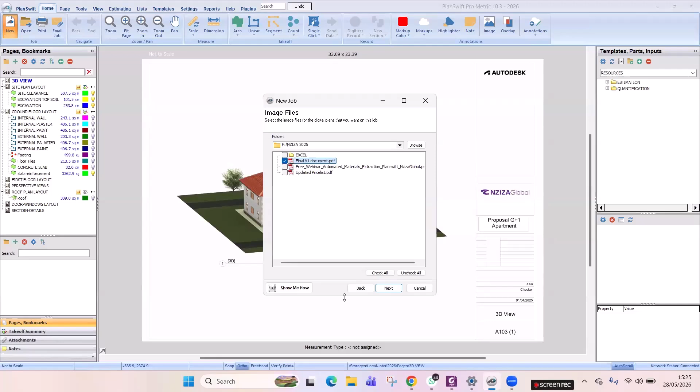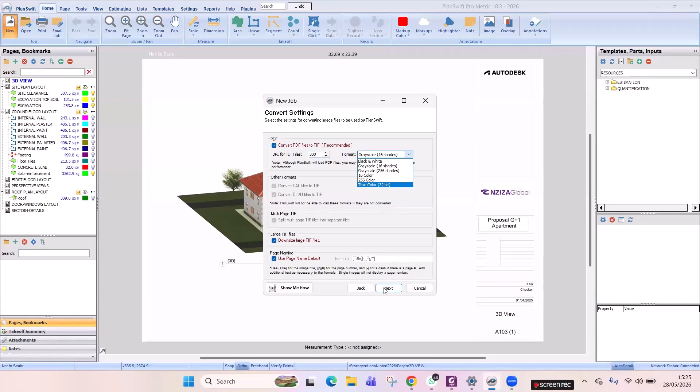Then next, you can adjust how you can read it. Can be 30, or can be 300, and then use 100. So use 300. Here I can use true colors in order to get our drawings clearly. Then finishing, it takes a few seconds, finishing or converting the drawing.

Now our drawing is opened, and it opened for all the pages you have. Here you see the 3D view of our project. Also here we see the roof. Here we see the ground plan. In order to help you, you must name it.

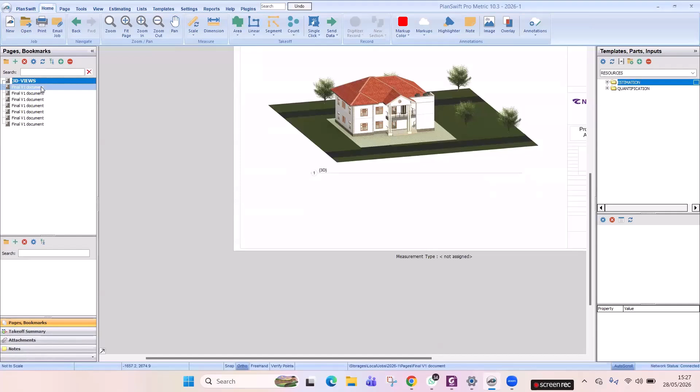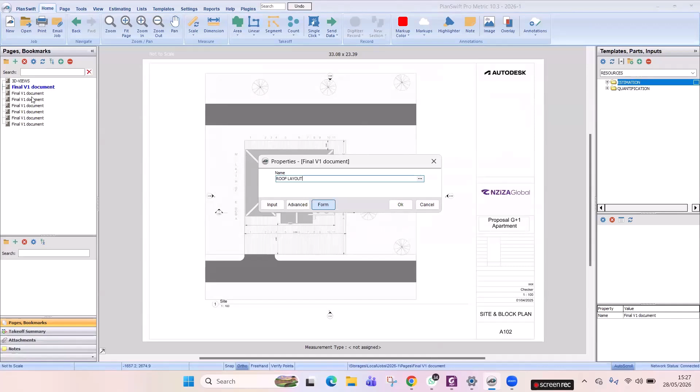This is the first page. You can right-click, go to properties, and set it as 3D view or 3D dimensions, isometric. This is the roof layout, so you can name it roof layout. This is the ground floor, so you can name it as ground floor.

Ground floor. The first floor. First floor.

This is the section perspective view. This is also, I think this is the roof. This is not roof, it's a site plan. This is site plan. Let me change site plan.

Then let me do this, this is the roof. Roof.

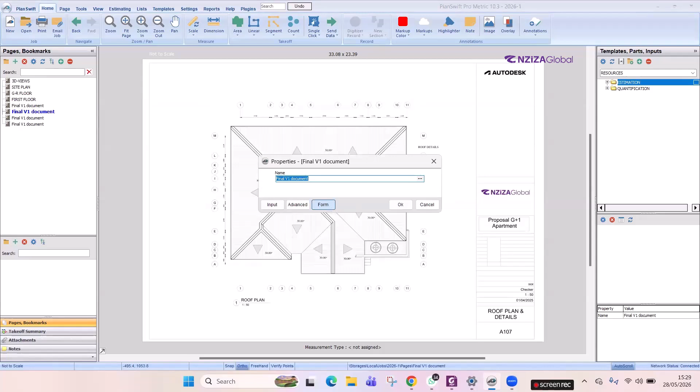This is the section. The section. Section window and doors.

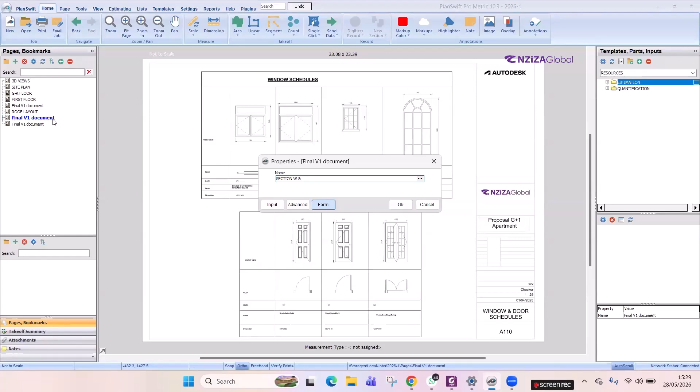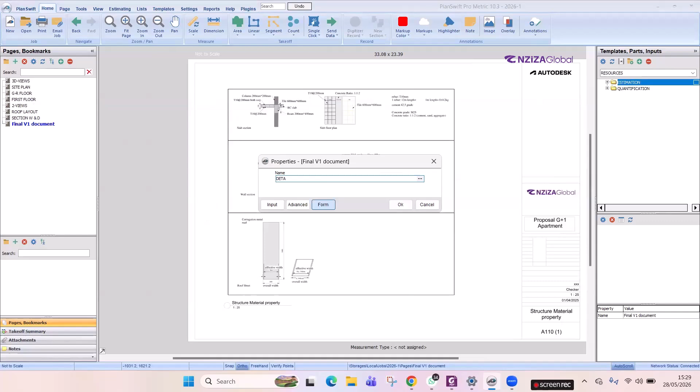The last one, it's this some details. Name it details. So those 4 sections.

This can help you to know what can be taken for the work, or the measurement you can take for first or ground floor in order to perform your project easily. You may name it so that it can help you in your requirements.

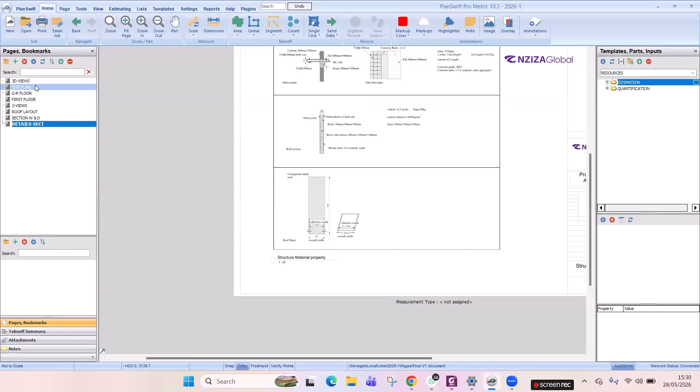So let me first go on the site plan. Site plan. Do you see, there is a...

dimension of 2 meters for the fence. Here there is 18.65 meters, and you must know if this dimension is in meters or millimeters, but most of the drawings are in millimeters.

So if you start without scaling, you can't perform your work. For example, let me show you. It means you can take off the area for the site, for example.

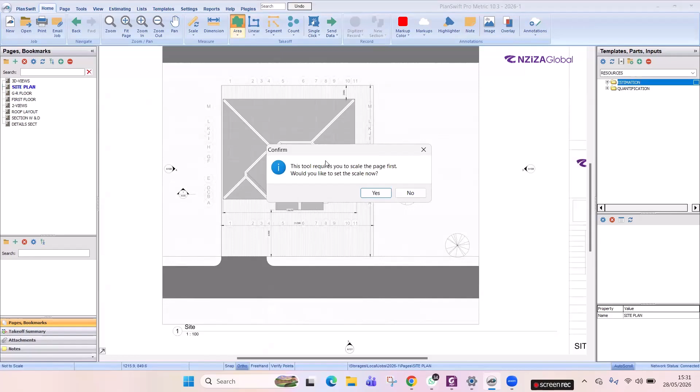You see, this tool requires you to scale the page first. Would you like to set the scale now? Yes. First, you have to scale the whole page you are doing the work on.

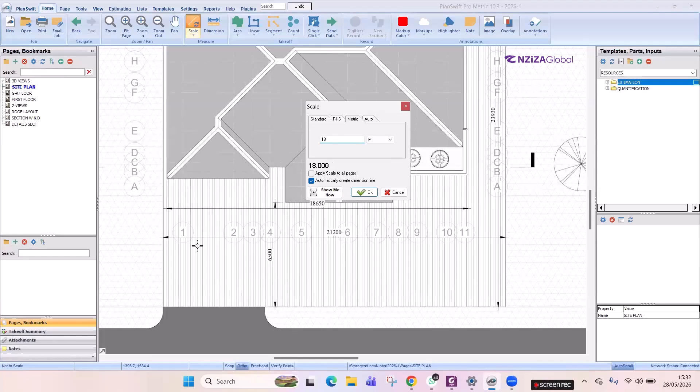This is, for example, let's take 18.65. Go to scale, metric. You have to use metric, or in order to use meters, say 18.65. Then you have to press the cursor from the starting point up to the end.

Do you see? This is the starting point, and the second point. So it's the first step, for measuring your work, first you have to scale. If you forget it, you can't go further.

So let's now take off for site clearance. You can go here, you can use this tab for area.

You can use it, or you can create the template. If you use area, you can do this. This is the site clearance. Site clearance.

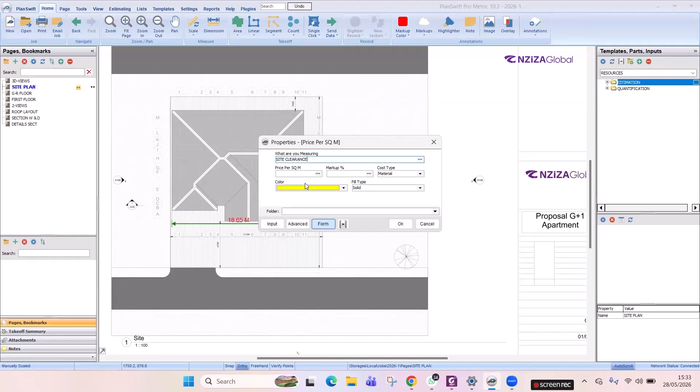Then price per square meter, that's okay. Then you have taken from this box, and use boxing for that here, because it's a box.

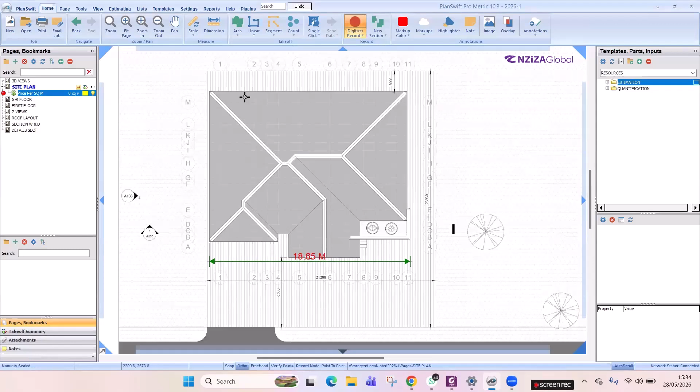You can use boxing for this verification, point to point record mode. You can use box. You start from here, sorry, from here up to this.

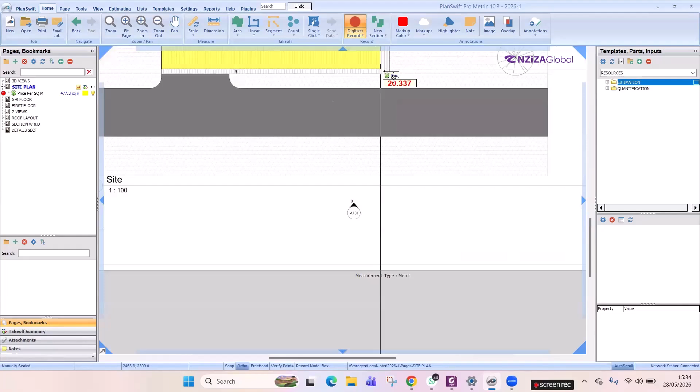This is our area. It means we have 477.3 square meters. This is the manual way.

Everyone can use it, but mostly the PlanSwift user can use it so that you can produce every dimension. Every item you take off can have the description and the quantity for quantification. Here we have the quantity only, but the description cannot have it.

For example, let me show it. If you go here at estimating group, you see the site clearance.

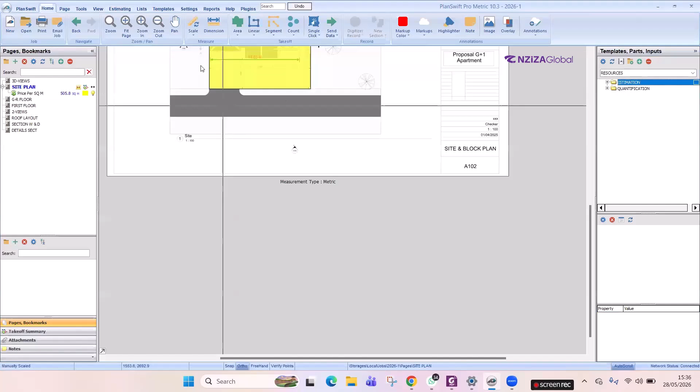But if you create the template, let me show you for template. You can create a template here for area. You can go here, area, then area, to create a new area.

Here we have advanced. In advanced, we have in this item description. If you right click for properties, you have description text set as one type of text in a group of items. Here on the sample list,

we can add description. Description will be the list in the list. Here we can choose the list, but simple list. This is combined list.

You have to select the PlanSwift description. It has the BOQ PlanSwift. Many of them, you can't have the data of that list, but don't worry, for those who will attend, will get it.

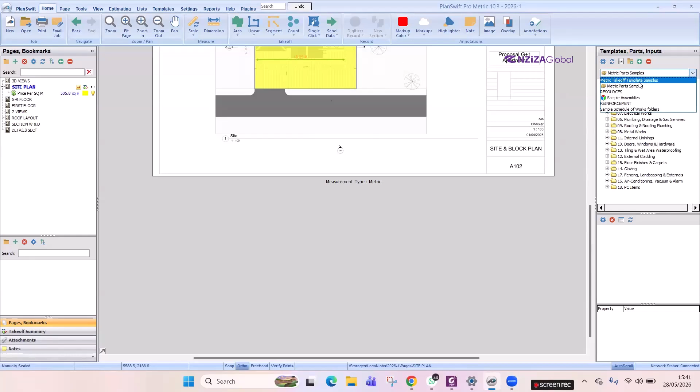See in our template, we see... let me see, we have to create the new area. New area 2, this is our template. This template can be used, so I think most of you know how to choose the template. Also, it's just to click it, site clearance, then here...

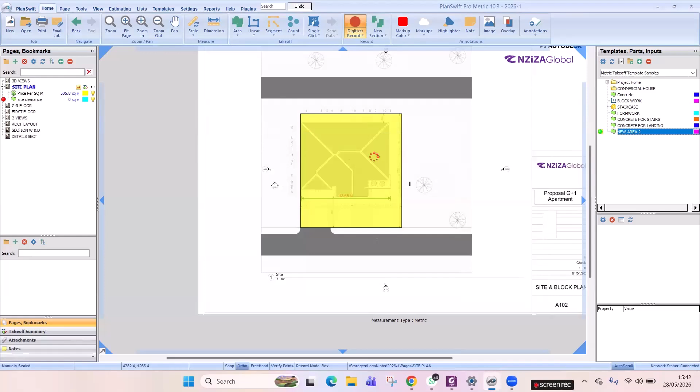We forgot to make the description visible, that's why it doesn't appear on the platform. Let me also do it, you see, this can be taken, and the site clearance will be on description. We have to select the clearance.

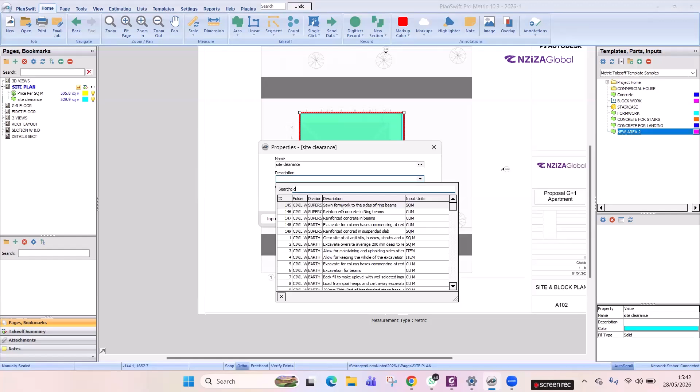Site clearance key. Now I think after finishing you can see the difference for views. Here we have site, but we have the description of the site. This description is clear site of all ant-hills, bushes, shrubs, undergrowth and cutting down trees. This can help you to produce the visual quantity at the end without typing any other description.

And also this template can be used also for other, like can use it for takeoff for any other areas, because you have the template. And...

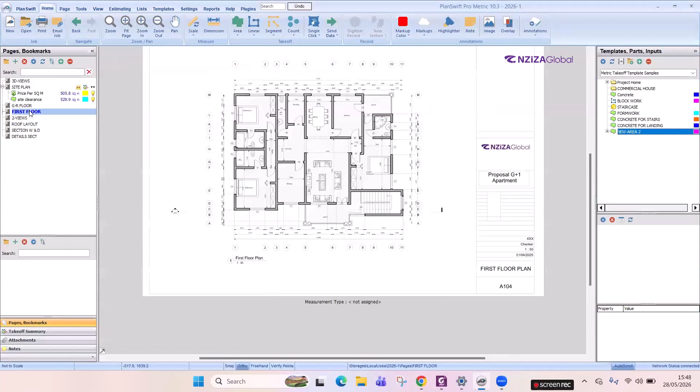If we go back, we can go on our first floor or ground floor for making excavation for 1.0 for topsoil, or 1.5, or 5.5 meter or depth can go on our area volume. This is not what I need, but you can use it.

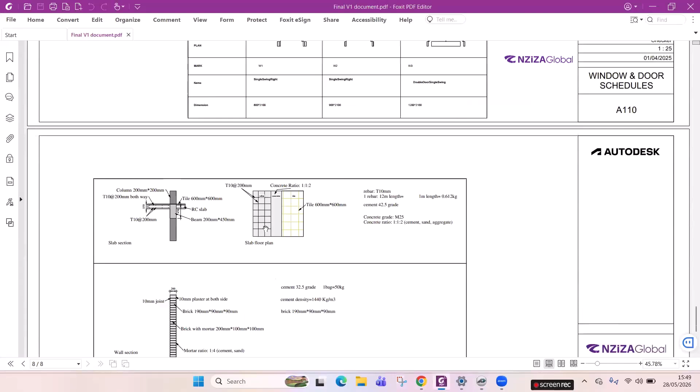Sorry, we forgot, firstly, as I have said, we have to make scale. First, you have to scale and set the metric. Let me share the image. It shows it's 17.45, 17.5, 17.45 meters. It's metric, it's okay.

Then you have to come from here up to the end. Have scaled. In our template, we have created this new area...

But you see it's only a sub for new area 2. You have to make it not a sub so that you can find it on a template, not as a sub of a new item. You see it, this is our volume, area volume, then make it.

There is the description, you have to search excavation. Can be excavation of 0.5 deep. Then depth, it is 0.5 meter. 0.5 meter, then it's okay. Remember, we have changed our record mode as a box, but here we have to make sure our area, and for those corners we have to change it to record mode into point by point.

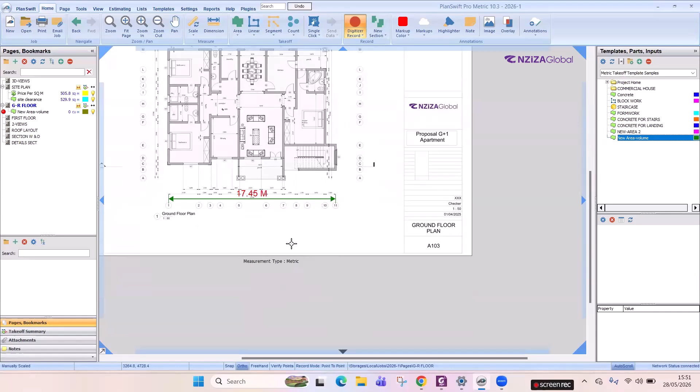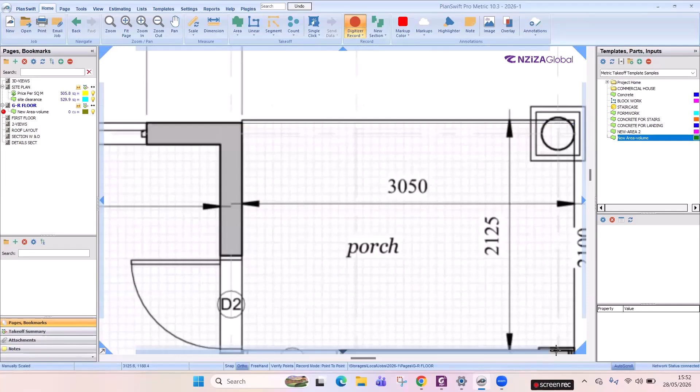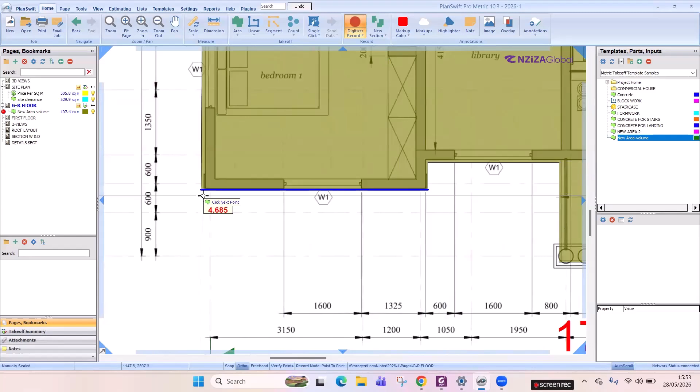If you're measuring first, you can go back for precising the corners. For example, let me do it first. I can't draw it without precision, but you can do it further after, can resize it. As we have said, it's digital, it's not manual, that's why we can't lose the work we have done.

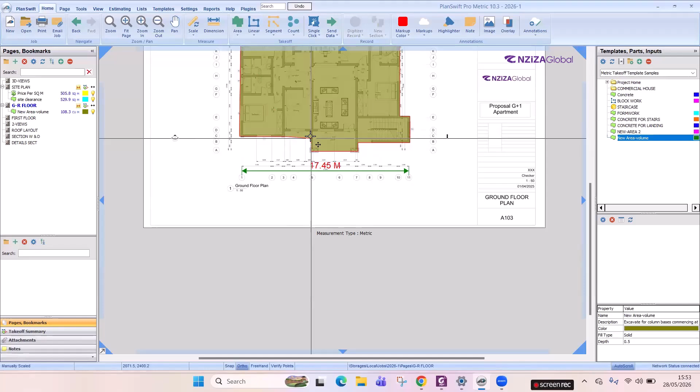You see, this, you can just make it, and you see that it's not precise on it. And on the corner, if you make it magnification, you have to know that it's not indicating at the right corner. You have to make it clearly at the corner.

It's dirt, and you have 108.3 cubic meters. So let me jump on the concrete in order to make the estimation very first. I think you understand how to create the template. The area can get the volume, area can line also can get the volume according to the creation of the template.

So let me use the template I've created for concrete. Concrete can be also on the area volume, but you can also copy and paste any area of any quantity you have measured if they are the same for volume. I quickly right click and so can just make concrete volume.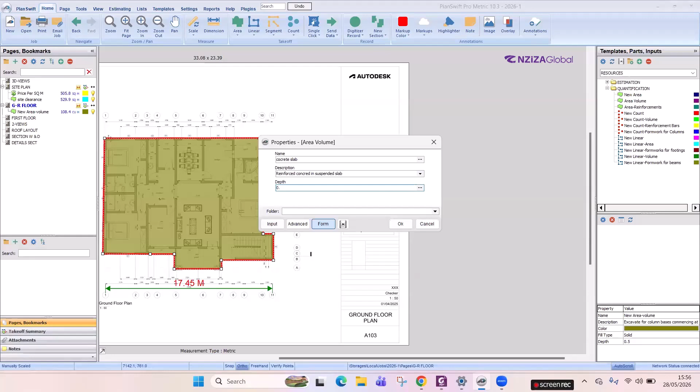Concrete, let me take concrete slab, then can be suspended or ground concrete. Yes, and the depth, let's see, mostly it's 0.1, it's 100 millimeter, then it's okay. So you have to make point by point.

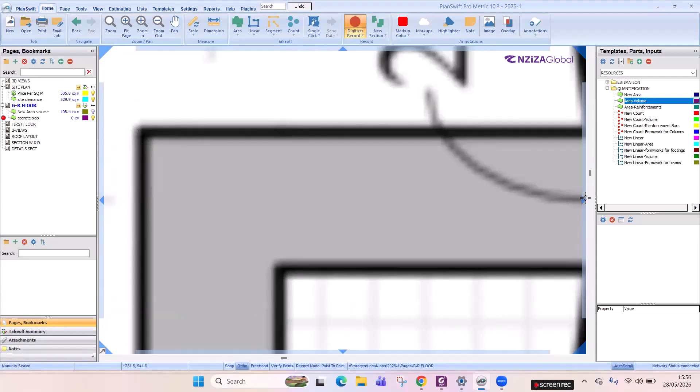Yeah, are you following? Hello guys, yes, we are following. Yes we are, yes. Yeah.

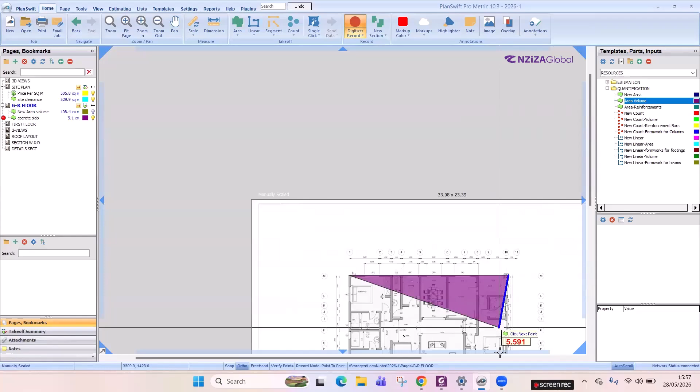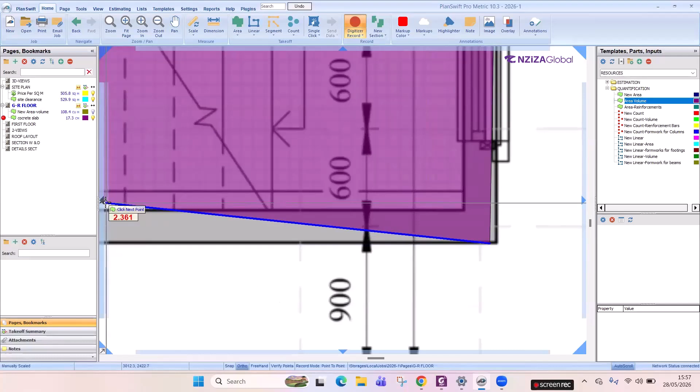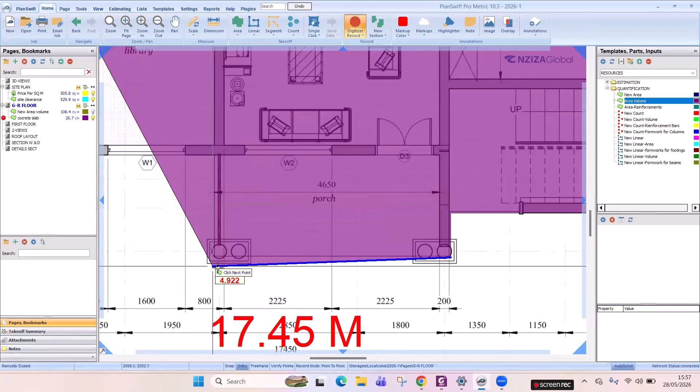This is starting. You can do it first, but remember to precise the corner. If you don't precise the corner, don't worry, you can do it after taking off. Don't click at the wrong corner. Oh okay, it's not manual, it's digital. I have to do it first, but precision, you have to do it. Don't forget it.

You see that our precision is not clear. Now can precise the corner. You see? Have to precise the corner.

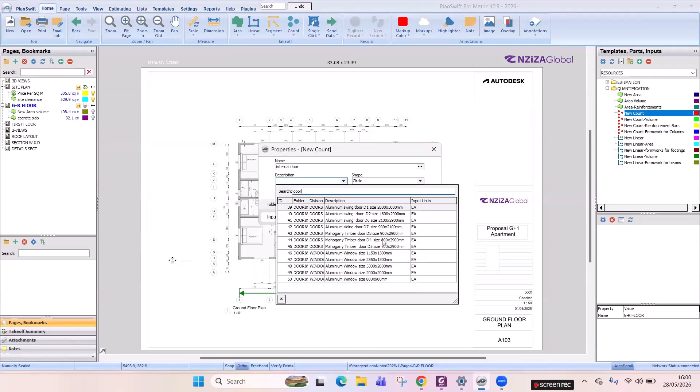Internal doors. Internal doors. Doors. It's internal. Let me select this one. Mahogany timber doors. Then okay, then you have just click.

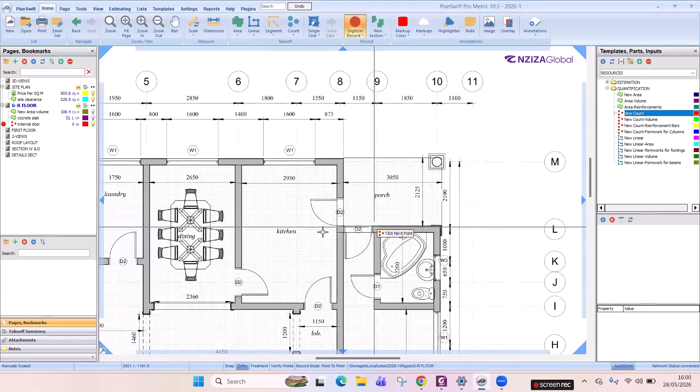Because here we have D1 and D2, pay attention to the drawings. If there's a door, it's a door. D2, I think the dimension can be different. So let me start for door 1. This is 1. This is also 1.

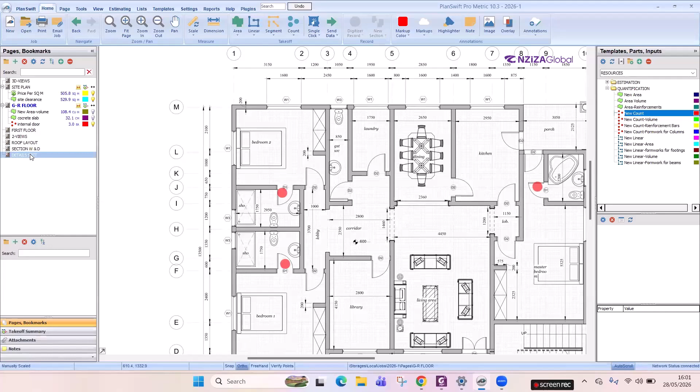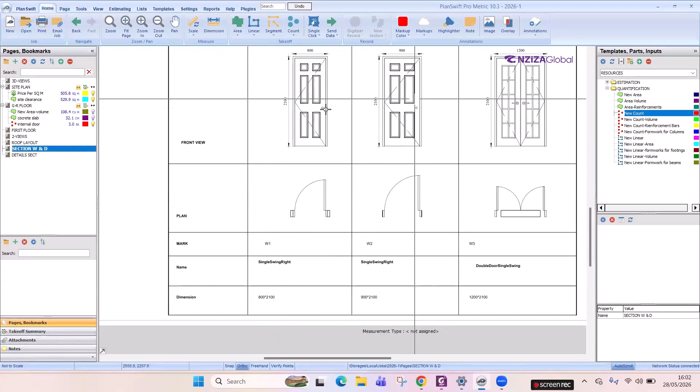Okay, you can measure also door 2, because internal door 1 and 2 are different. Let me see the dimension for doors. Is it different? Doors. Yes, it's different. Like on the window, there's window 2 and window 1 also different on dimension. Door 1 it's 0.8 for 2.1, and the other it's 0.9 up to 2.1. So let me go to estimating.

You can go here on that tab of estimating. You see that you have measured the site clearance, you have measured the excavation, you have measured the reinforced concrete. So for example, for the site clearance, see that there is the quantity, but on the cost per each, there is nothing, it's 0.

Are you getting me? Yes, okay, getting you. We have to apply our job into what the people can do that work. Site clearance can be done by laborers, which are skilled or unskilled, can be done by equipment, the machines, with an operator. Because machines or equipment cannot be separate from the operator, the cost for operator for the machine or equipment can be included with the operator. So let me use the labor.

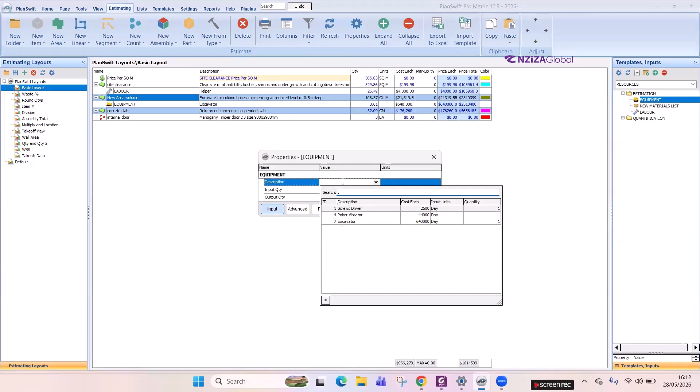And we need also the vibrator, poker vibrator. One also can be vibrated for 6 cubic meter.

Then let me also add rebars. The rebar can be, take one mason can produce, or let me take, if 6 masonry can help 60 helpers to produce 150, means one can produce 25 cubic meter.

Even you can also add the helper. One helper can also produce 25 per day. Then it's okay.

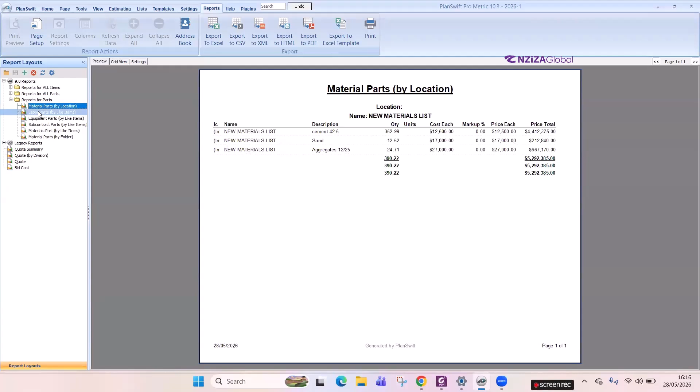And you see that you can get the material list. You see, you can just see the part by location. You can produce these items by labor, then you can export by Excel template, or you can do it by materials. You can sand, you can get the total sand for all.

If you do the job, your project on PlanSwift, all cement bags can get the rest of that. If the sand, you can get the total volume of sand you need for the total project, even for aggregate.

And it's like the materials. This is the combination of, for one item, you can get it all by division or by folder. For example, by division, you have it all for material, for labor, for equipment. It's well detailed.

Those you don't need for estimating group, you can go here and remove it. For example, this markup, you can make it unavailable. Colors cannot, you can color, can even price per each.

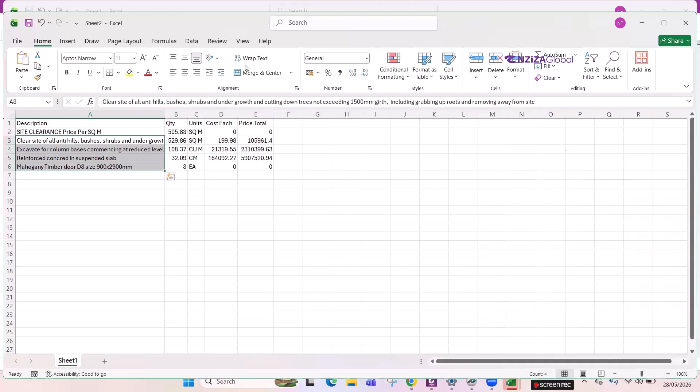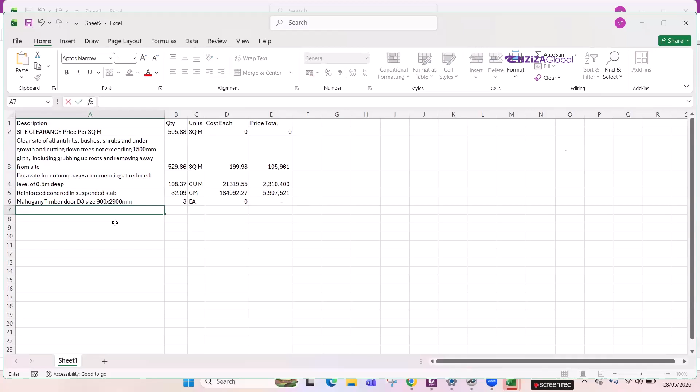Make it visible, and here you can make it at Rwandan francs, and here can get total, can make total. Here I can make a sum, total sum.

It's okay. This can be good for presenting your project you have done, your takeoff for BOQ, and you can report it. You see that it's a good one, which is digital for QS, cost estimators, engineers, and so on, and all of you can use it. So you have to use it.

Also you can export by division. This one can export as Excel, and you save it. How to save it? Well, here you want, for example, I can save Nziza.

Okay. The 2006. 26. Okay.

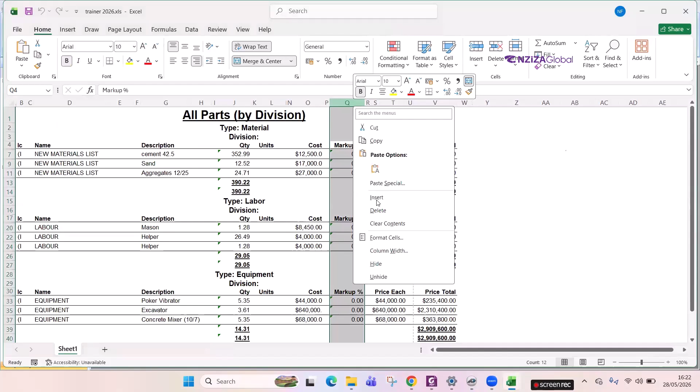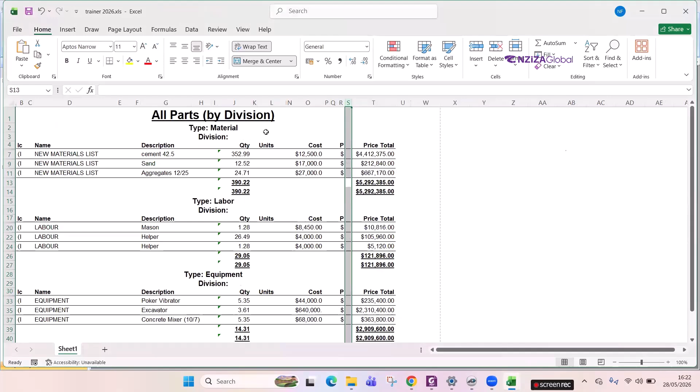You see it's there. Here I can remove any you need. You can remove it for PlanSwift, or we can remove it on the Excel. See, it helps you to know the material, the quantity, and the price by division, the labors and equipment.

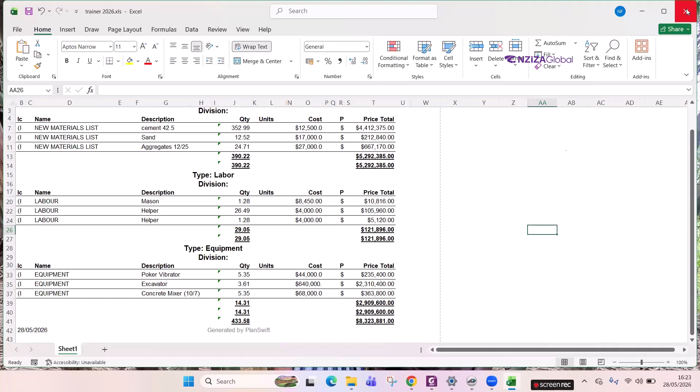Yes, I can show you what I have done before. You may open any job you have done before.

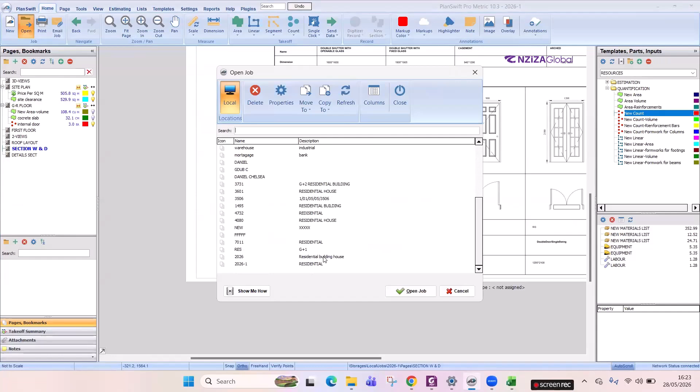This is all I have done in it. Let me open this one.

It's that one, but I have done many things for it. If you see it, how it looks like, and for reporting also you will see.

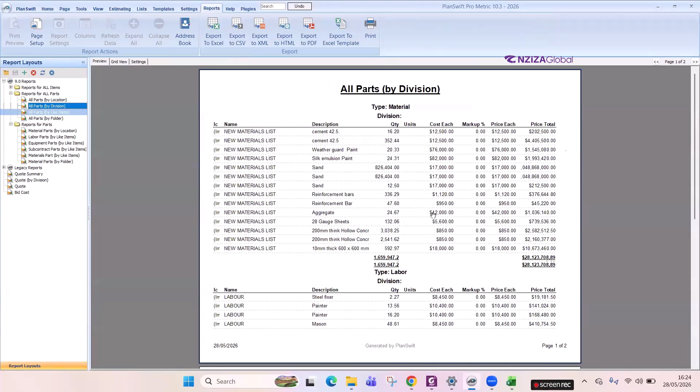As I have told you, do you see those are the materials? Those are the laborers, steel fixers, painter, and mason. And all of those are mason.

It looks like this. Thank you.

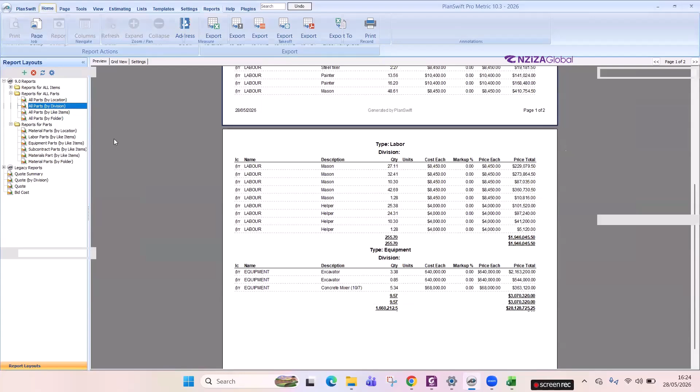Sorry Faustin, can I ask a question? What about if you had to change the units? Do they remain only in dollars, or what if you want to use local currency for pricing the BOQ?

This price, this dollar, it's one of the settings on PlanSwift.

But as you see, you can export your job, your data into Excel, and you can apply any currency you need to use.

Do you see? Here can you see any price, any currency you need? If you export it, you can get it.

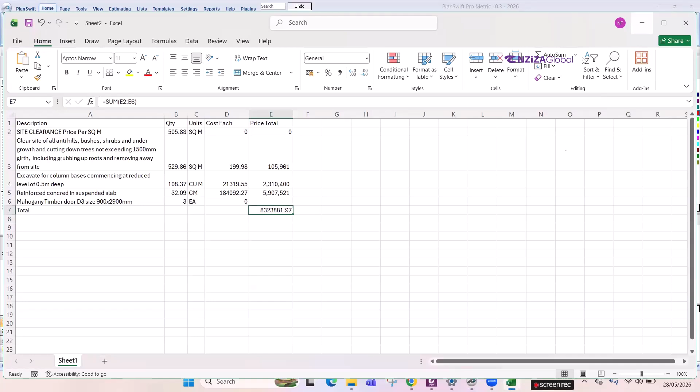Okay, yes please, I see it's clear now. Thank you very much. Okay.

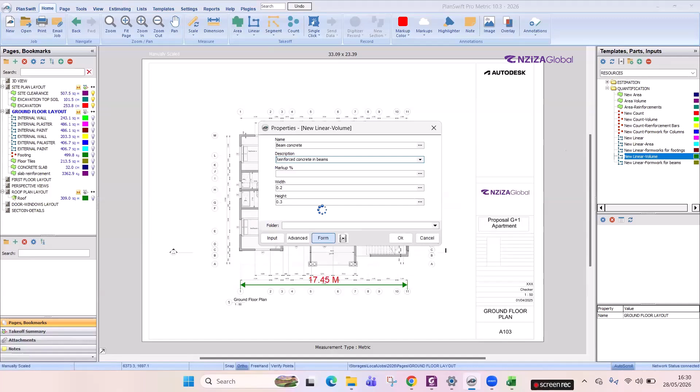Let me use this, okay? Then it's okay. You have to make this linear, it will give us the volume. If you go here...

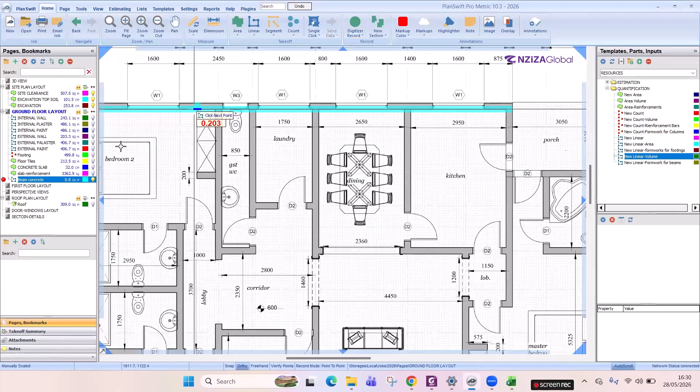Let me just here, because I need to show you it's... oh sorry, it's there. Do you see this? I have just measured, but remember, if you don't precise the corner, you have to take it.

This beam has 20 width, that's why you see the line width of the beam. Do you see? Yeah, you have the beam here.

Okay, thank you. Yeah. Okay, thank you so much. You're welcome.

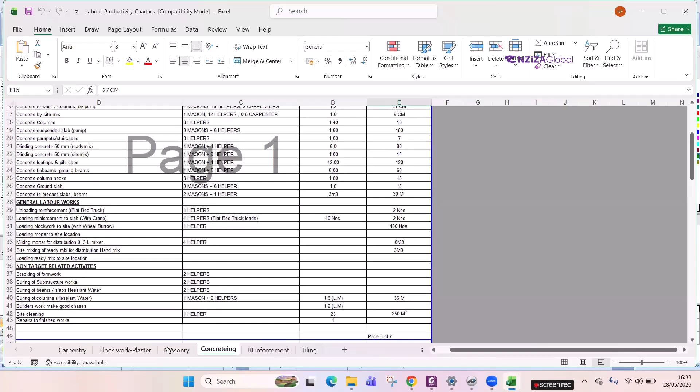You have to consult the foreman and the site managers, engineers to get that information. So don't use PlanSwift and just pull it without considering or making the analysis for the work that can be done.

So thank you. You can move on to your question.

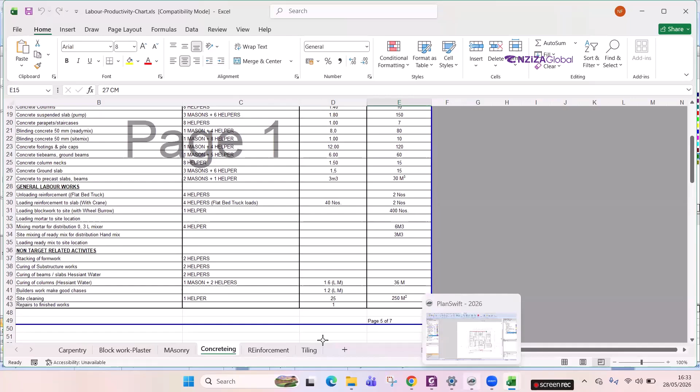My question is, most of the time when I use PlanSwift, I face the problem of counting steel bars, and when I go to the MEP, calculating the vertical tools and materials like pipes and wires. How can I do it with these softwares? Thank you.

Today I won't show about it because I don't have the drawing, but most of the question is about the drawing, because you have to make the MEP for this drawing, it's not drawing for MEP. With many drawings, the engineers can provide us these drawings and ask us to produce MEP based on quantity, but they have to produce the MEP drawings that help us know the navigation of the pipes from drawings.

You must know there are some standards. The pipe can pass through the height of the wall. You must know the height of the wall, because on the drawing you can't measure the height of the wall directly, but you can type it. As you see, if I'm doing this linear volume, I can type only the depth and width, then I can measure the linear total.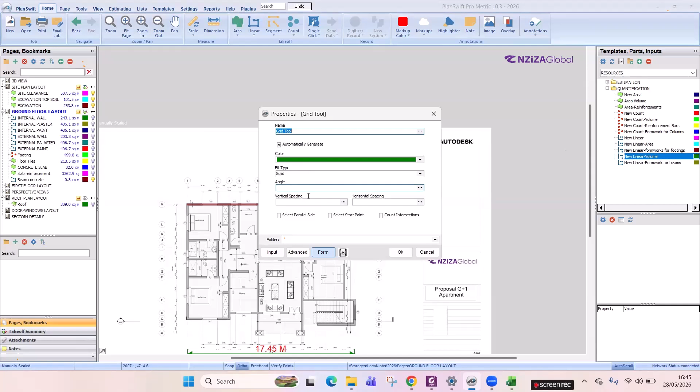You have to know, is this angle in degrees? It can be this, 90. Spacing can be 150. But remember, is this unit in meter or in millimeter? Let me see if it's in meter. Have you seen it? Let me see.

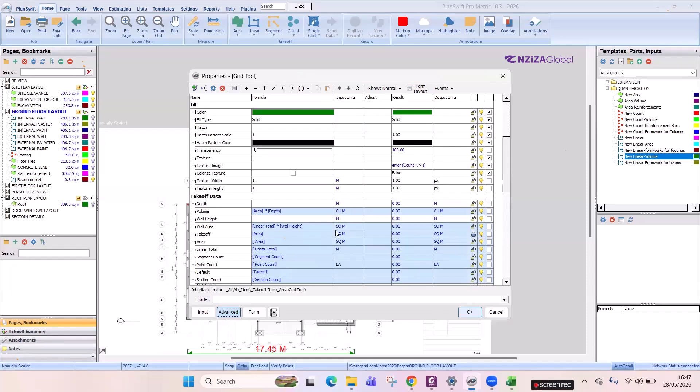All right, let me just do it. If it's not, I will get it. So you have to make the takeoff. This is the method that can be used for reinforcement, for measuring the reinforcement. It will be here, and make this one clear. This also.

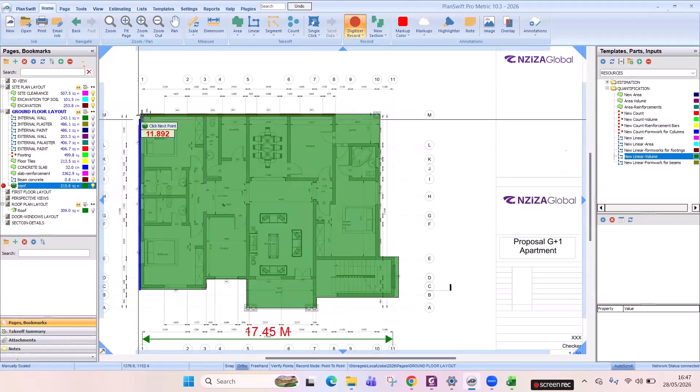I see that the grid line is 0. I think it's not working for what I have. Let me go back on the grid tools I've used. This can be 0.150, and this will be 0.150. It's okay.

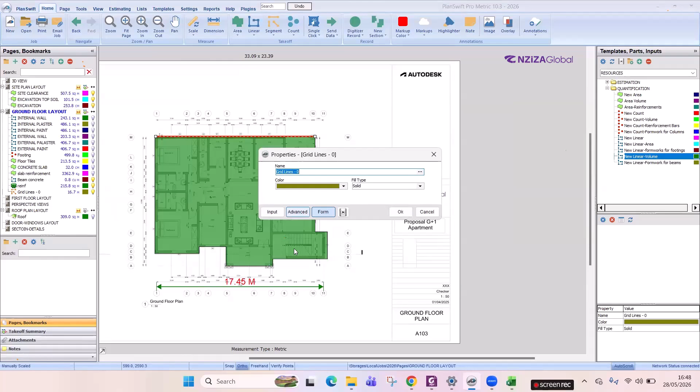What about it? First, you have to know if the vertical and horizontal is on. Don't get it, but time is limited. If it's produced, you can get the grid lines, which is the reinforcement bars on horizontal.

I didn't. Let me see. It's not working, this one. But another way, how to create a template - this one you can use so you can get the lines, but you can make a template. If you make the template, you have to make the area reinforcement.

In area reinforcement, firstly you must add the vertical line - the long side. It means many of the plans can be a rectangle or a square, but most of them have a shape like a triangle, so you have to know the long side. And you have to add the horizontal sides.

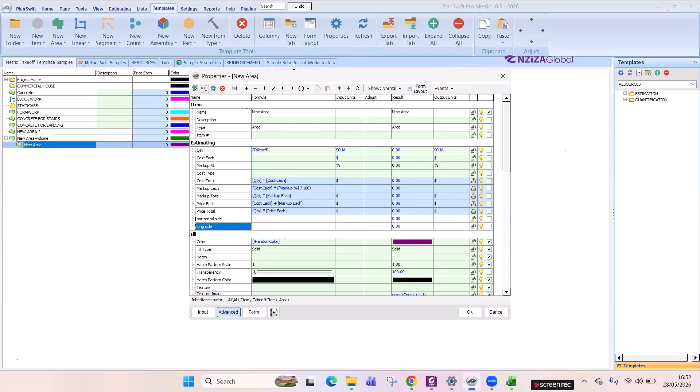Or it can be in the long bar quantity. I think the time is limited. Let me show the one I have created because time is running out. Let me just show you the one I have created for this reinforcement.

For example, this is the count volume. This count volume will help you for the reinforcement bars for the footing. It also asks you the long side, as I have told you, the short side, the intersection, and cover for both sides, and the diameter for the bars - 12 or 16 or any. Then the cover sides on both sides have to multiply by 2. Then the vertical bend and the vertical sides.

Then if you go to the advanced, you have that. You have to know there is the sum of the bent - I think you have seen this. The sum of the bent is the bent times the sides of the bent. The sum of cover is cover times the sides of cover.

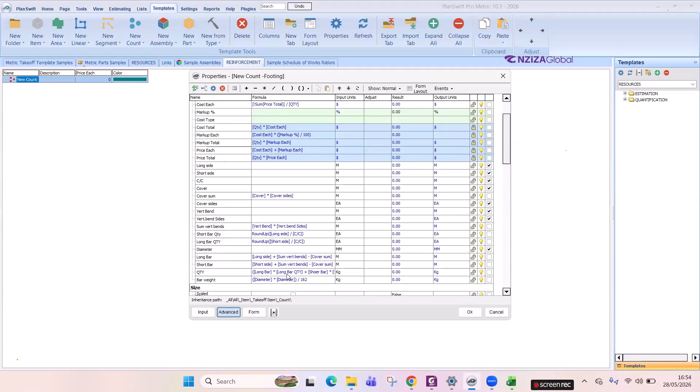Let me make this visible. It's long bar times long bar quantity, plus short bar times short bar quantity, then times the bar weight. Bar weight means - if there are 12, most of you know how to get the kilograms in 1 meter - it's the square of the diameter of that bar, then divide by 162. Then after you have to multiply by the takeoff.

I think you understand the formula, how to make the template. This one can be used so you can get the number of kilograms for any slabs or any reinforcement. So I think it's understandable. Yeah, I think that's it.